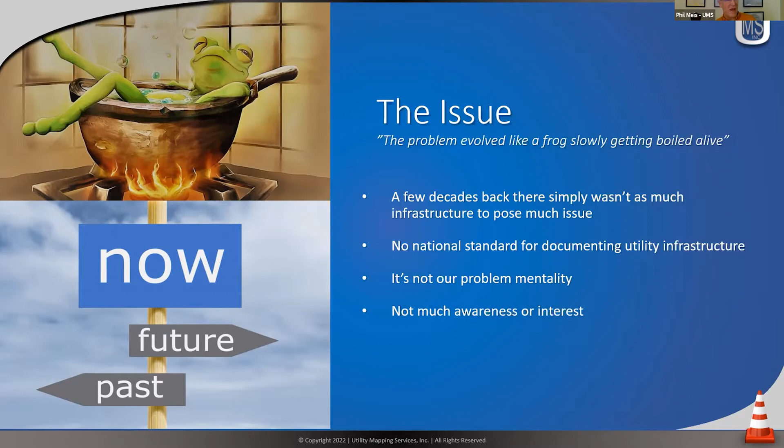And as we all know, we kind of let ourselves sleep at the wheel here. The issue kind of sneaked up on us where we only had one gas company, one Ma Bell, and it wasn't really much of a problem. Now we've got so many things out there. It's really changed to where we have to up our game on how we manage data. And the best time to do that, what I'll talk about with ASCE 75, is documenting them at the time of installation. I mean, that's really kind of a no-brainer.

But so we know utilities are at risk. It's really become a major issue, especially in urban environments. This is actually the same street, and going out after the fact and trying to paint the ground and recreate what's out there is really a horrific operation, and obviously in some cases almost impossible to do. And we're winding up with a lot of issues, paint on the ground, trying to work that into the plans. That's really kind of a primitive way of doing things, but it is a damage prevention process. It's very important, but it's not very conducive for design.

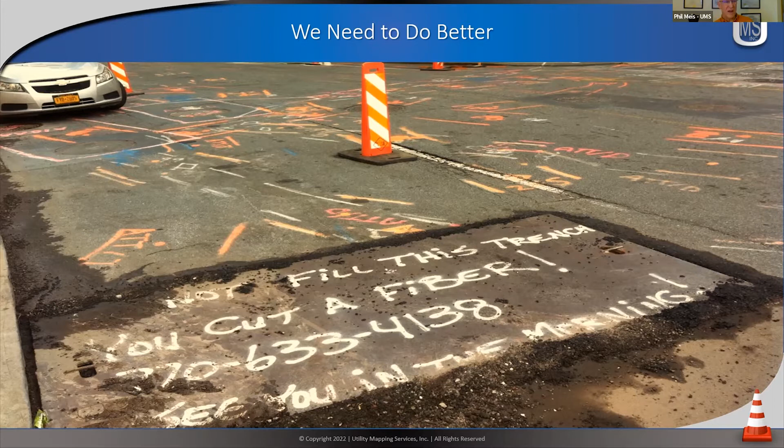And these standards from ASCE have in mind backing it up to when we're in the design stages and trying to get things right so that we can get our designs right to mitigate issues with the existing utilities and try to expedite the construction. We're spending way too much time in the field trying to adjust things, pushing the risk to the contractor. And obviously we know that these are troublesome avenues to take.

So as I think Paige mentioned earlier, the Common Ground Alliance did an investigation. In the last report, 2019, they documented about 500,000 strikes in the U.S. And if you figure that over a 10-hour workday, that's a strike about every minute. I saw earlier that in Ontario, I think, 7 gas lines are getting hit a day.

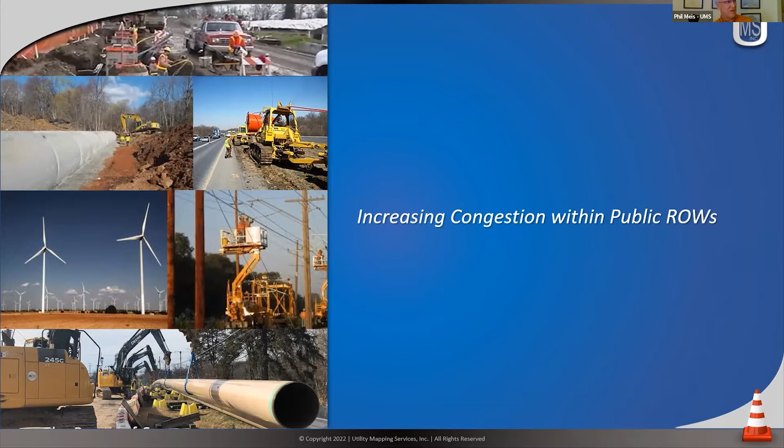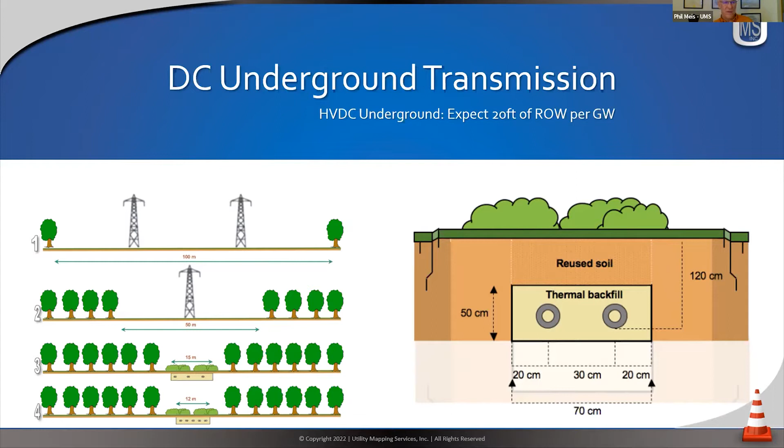Anyway, it's only going to get worse as we open up our right of way for 5G installations to connect up communities and replace old infrastructure. We have population growth, so we have to expand. We have renewable energy sources that we have to collect, and we have charging stations we need to install. So it's really getting exacerbated in the U.S., and I'm sure in Canada. If you're going to be putting in charging stations, you're going to need to install high voltage DC transmission lines, which is one of the things that enables high speed charging, and they require some space. So again, it's just getting worse.

So that's why ASCE stepped in. The American Society of Civil Engineers said, look, what the engineer does and puts out there for construction has a multitude of impacts to the traveling public, the safety, the project schedule, contractor risk, and the ratepayers and the taxpayers all pay for it.

So it really goes back to public welfare, and that's why these standards are engineering standards. What we'd like to do is enter into a world where we can have things well laid out, well understood, in the design stages, and then start applying 3D design technologies, virtual design and construction technologies, and make it so that the construction experience can go as fast as possible with the least amount of risk and issue. And that's going to save everyone money and a lot of headaches.

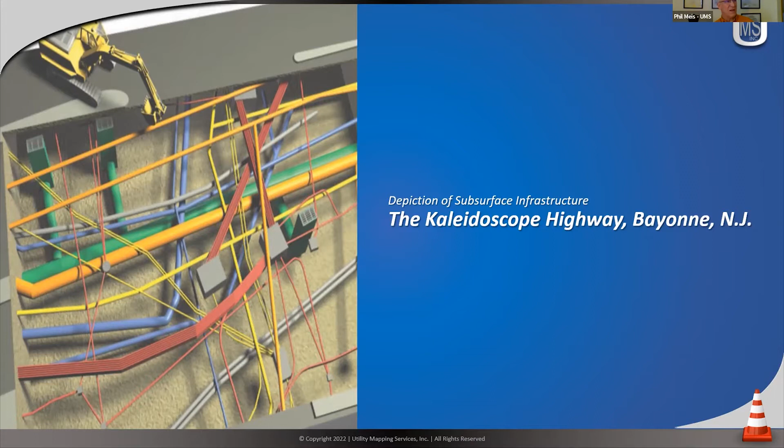And indeed, we have some examples. We can go back. This is 7 years ago now, but this is a project we were involved with, where we were able to collect data in 3D by using some extra methods and technologies, ground penetrating radar and some of the electromagnetic tools. But we didn't have a way to really depict that information. And this was the first use of Bentley's SUDA application, where we were the beta testing team for that application. So we were excited to apply it for an actual project, a gas main installation.

And we mapped all the utilities out in 3D. We designed the gas main in 3D, and the value that came out of that was really surprising. I mean, we kind of suspected that, but by having things where you can view it, the DOT officials that were reviewing the permit application were able to actually see why the gas main wanted to go where it did out in the road, where they wanted an open cut and they wanted a depth variance.

And initially, the DOT, they told us afterwards, they went into the meeting with the mindset, we're not going to let them go under our road. But then after they saw the congestion and why the alignment was selected as it was, it's a high pressure gas main, you need to get that out of harm's way. They actually granted an open cut and a depth variance waiver.

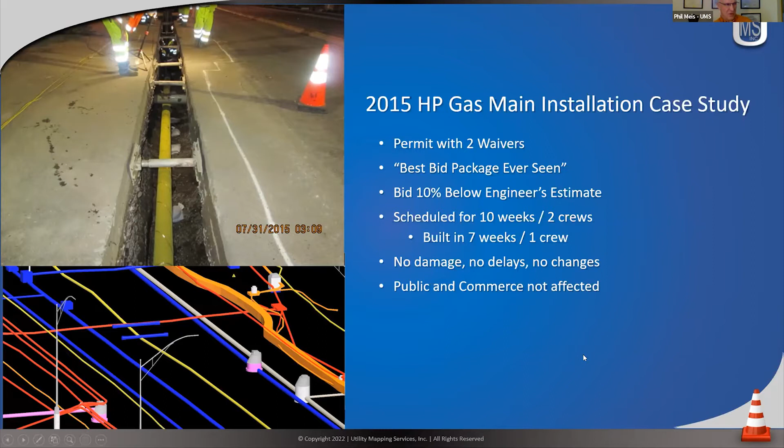Typically, you're doing field fits and you had delays. Public and commerce were not affected. In fact, they had DOT people traveling that road. They didn't even notice the work that was being done. So it was one of the very successful projects. It was built as designed. So that's just a case study, just to show how much value can be reaped by having your data good going into the design and into the construction.

So there's 2 standards, 38 and 75. Both of these standards, by the way, are on parallel tracks. They've both gone through their public comment. They're in at ASCE pubs right now, and I suspect that they will be out for publication, I mean, for consumption, within the next month or 2. If Jim Anspach's on it, he's probably going, it's going to be 2 months. But anyway, it's right there. And I'm going to talk about 38 first, and then I'll talk about 75.

75 is basically a sister standard for 38. And I would suspect at some point in the future, these 2 standards will merge into the same standard. 38 addresses the fact that we didn't keep track of that stuff when it went in the ground, and we're trying to figure it out after the fact. So it basically addresses the symptoms, but it doesn't resolve the problem.

And 75 says, let's track it when it goes in the ground in the first place, or if it's exposed during construction, let's get it right and get this information. And it's not saying what technologies to use. We're just basically saying this is the data you want to collect and manage. And there's another standard I'll mention at the end, OGC, Open Geospatial Consortium, which is a standard for making that data from 75 interoperable, so that you can basically seamlessly transfer it to different softwares and applications.

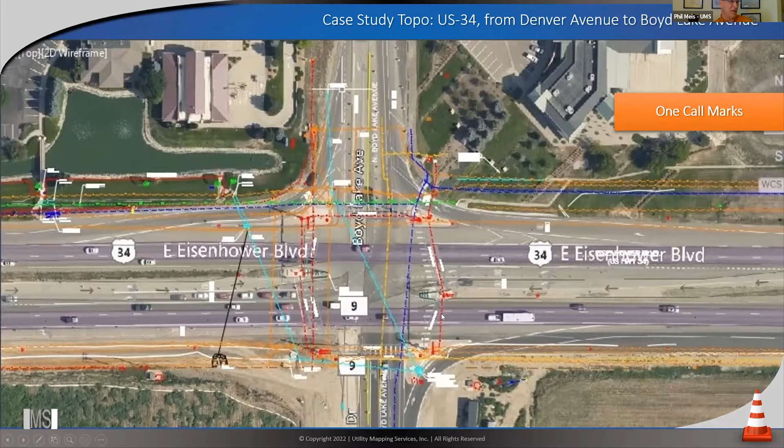And then A would be exposed and discrete. And again, the PE is putting the seal to it, and it elevates it to a professional effort akin to a property boundary survey or a geotechnical investigation. This is an example here, just prior to the Colorado law change, where a project was going to go out to bid. The law changed and we had to go back on this project. You can see the utilities that are depicted, it looks pretty good, but this is based on records and the conventional methods of pulling the information together.

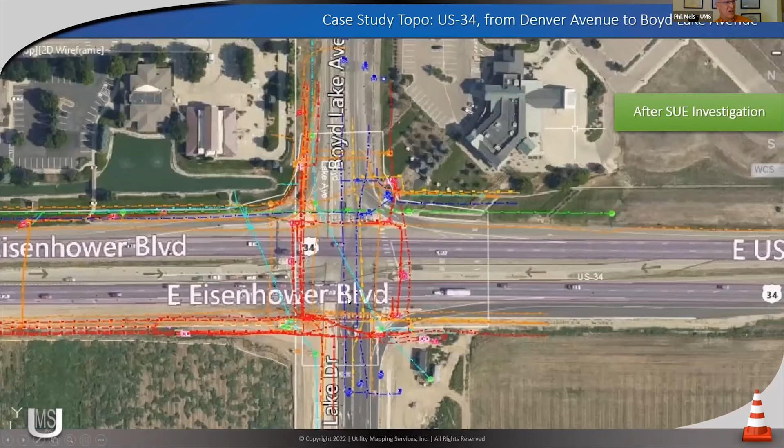This is the same intersection. I'm going to just go back and forth here. This is after a 38 investigation and you can see the density of utilities is increasing, the alignments are changing somewhat dramatically. And these are just some of the things that were identified. There's quite a few things that were wrong. It's been documented as a very good process.

ASCE 38, again, it's a prescriptive and a performance standard. You need to have pre-qualified people to do this work and be able to stand behind it. And the errors and omissions insurance that backs up that company needs to understand what that company is doing and sealing and be able to stand behind it. You need to understand the uncertainty so that the engineer knows where more information is required to complete the designs, so they can modify and adapt designs to avoid conflicts. There's big decisions that are made with this data. You want to make sure that the information is right, and you understand where it's good and where it's not, and have that clearly identified.

For the 38 investigation, you might know on either side of the street very well where that facility is, but where it dived under the street, say they bored it in and they went deeper than the geophysical methods can detect, then you have to fall back to a lower quality level, or maybe use some of these nice new gyroscopic tools, if you had an empty conduit.

We want to accelerate the project delivery process. Again, time is money, and make the public experience less disruptive, less painful. Make sure the project is constructible before the contractor even breaks pavement or breaks ground, and come up with solutions to problems before they happen. It's just a measure twice, cut once mentality here.

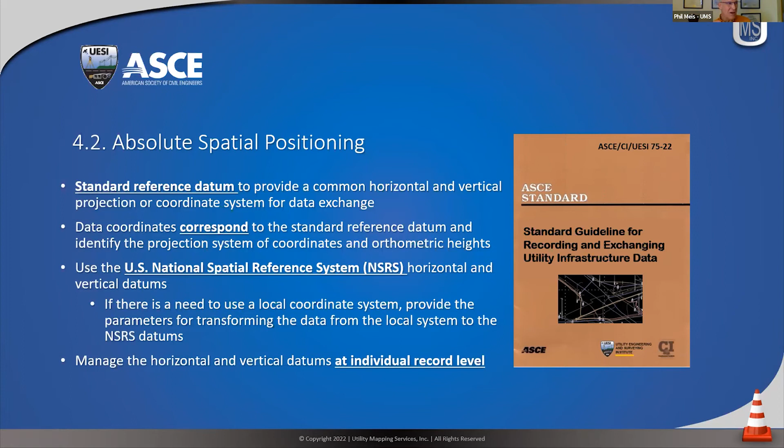Having a standard datum is a big deal. I came from NOAA, the National Oceanic and Atmospheric Administration. This is the same thing we do for nautical charts, hazards to navigation. We're just applying it to hazards to excavation. Everything is referenced to the National Spatial Reference System. Why do you do that?

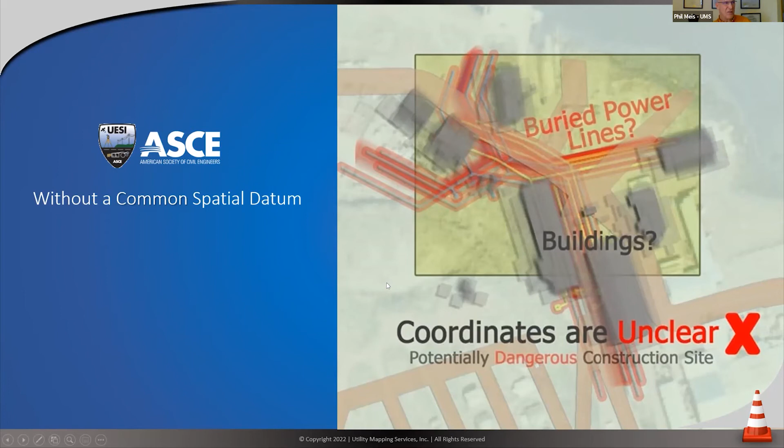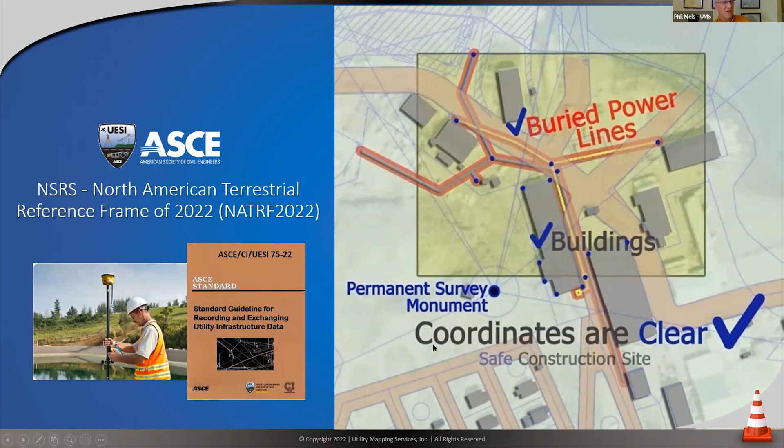Well, that gets rid of all the distortion that happens when you're trying to take something on a sphere and flatten it onto a flat plane. There's different projections, state plane, county coordinates, UTM, and they all distort the image. By having everything referenced to the National Spatial Reference System, when you bring it together, it's going to go in the same spot every time. And it accounts even for plate tectonics and crustal drift, and in places like California, that's a big deal over 20 years. And that's easy to do.

Whenever you turn on your GNSS system, you're tied into your National Spatial Reference System. Canada has a very similar one; in fact, I think they're using the same one for North America. The National Spatial Reference System is being upgraded, and it should come out, I think, in another year.

The other thing is observations. If you're using that LiDAR system we saw earlier, you can just pull data at this frequency or tighter. The idea is to get enough observations to achieve the accuracy that's required. There's an accuracy table that goes with the standard, which we basically piggybacked off of CSA 250, the Canadian standard. And we have CSA 250 people on our standard committee, by the way, very helpful.

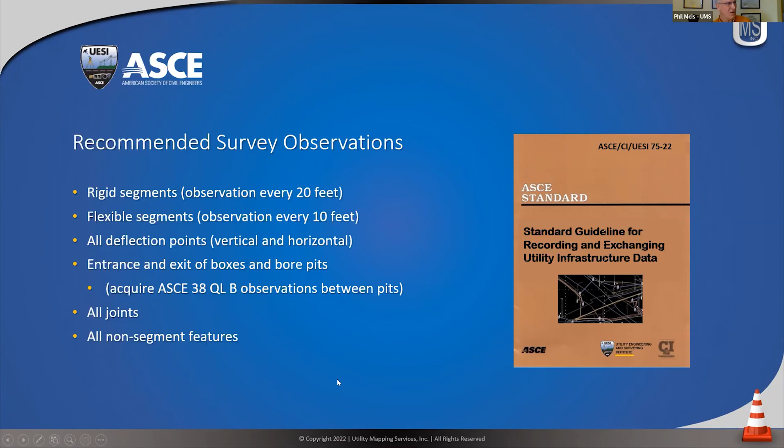They told us we want to see this succeed, and there are three things we wish we would have done with CSA 250. One was make it digital, two was make it 3D, and three was to also include above ground infrastructure with the standard. So we made sure we brought that into 75, and going forward we're sharing our information back and forth, and you'll see that the standards are probably going to merge together and be very similar in nature.

Another thing was the observations. If you're getting the top center of the pipe, you record that, but what's exchanged will be the reduction, so it'll be the center of that infrastructure, typically the center of the pipe.

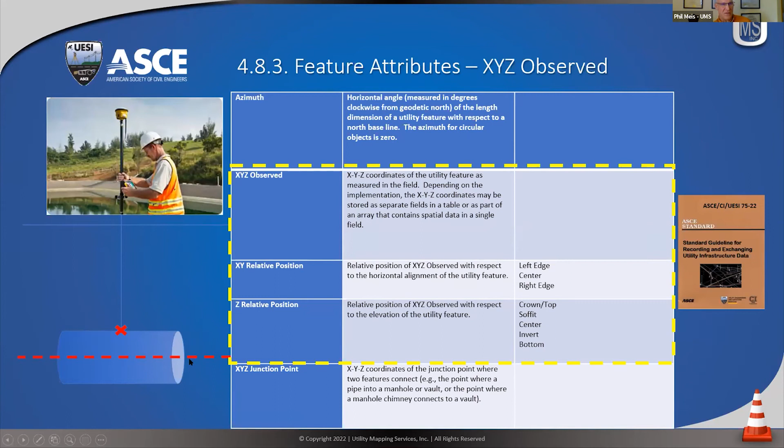There's data stewardship. We addressed what to do if it's sensitive and secure information. There are standards we are referencing here in the US; we're using 49 CFR 1520, which talks about how to manage sensitive and secure information. That's a big issue with a lot of utility owners. They don't want that information available to everyone. That guidance is provided in the standard to make sure that information is kept secure.

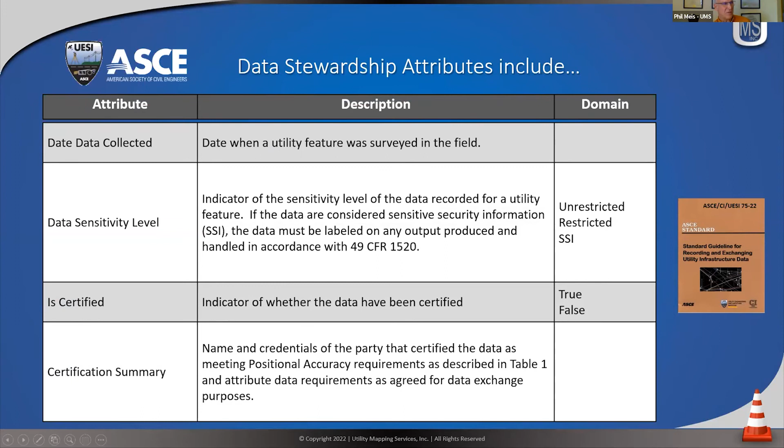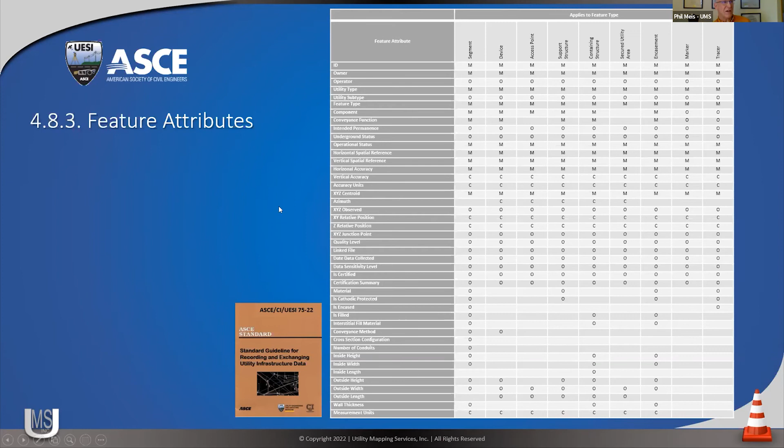That alleviates their concerns. Don't expect to read this, but you have minimum, optional and conditional attributes. We have one table for documenting infrastructure, and these are the minimum requirements, the M's. Basically we want enough information that we can create a digital twin or a very useful 3D model of that infrastructure in a standardized manner.

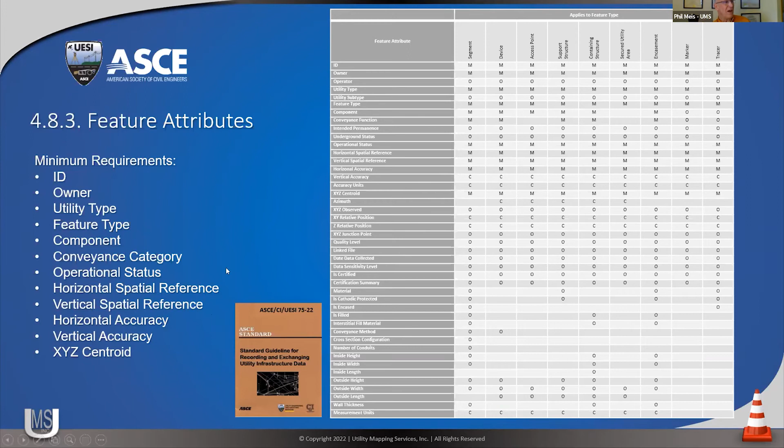We'll have to have, maybe at the next conference, a workshop and actually go through this. But this is just showing how it's applied in the field. If, say, you're putting in the sanitary sewer force main, you would take observations at a frequency necessary to achieve the accuracy standard.

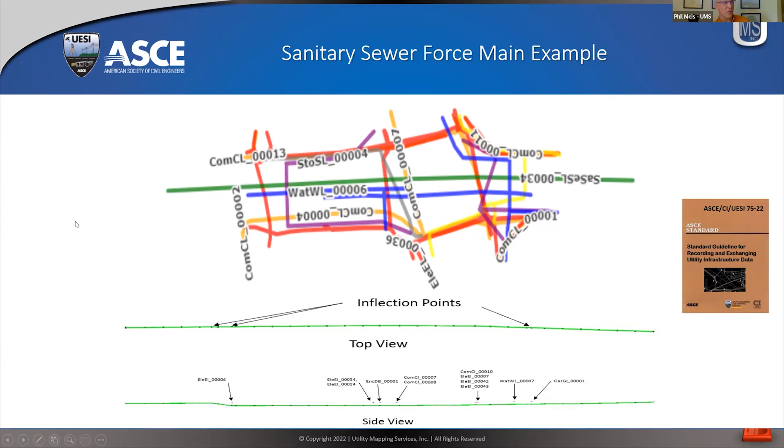There's an accuracy table that goes with this standard, and then you're also going to take observations of anything exposed that you might encounter along the way, and document that as well. That's free data, so not only document what you're putting in, but anything you expose along the way. So this standard can be applied for contractors for utilities when they permit to go on the right of way. It's a fairly easy to implement standard.

Directional drilling, you'd have observations at the bore pits, and if you had a test pit where you had to bore through it, you could get accuracy levels to the accuracy that's required. And then in between, we also lean on ASCE 38, so you'd have ASCE 38 quality level B data where you would use gyro or other geophysical electromagnetic tools to get depth information, and that's all included. So every observation records where that data came from, if it was a direct observation or if it's quality level, and you have horizontal and vertical accuracies that go with that.

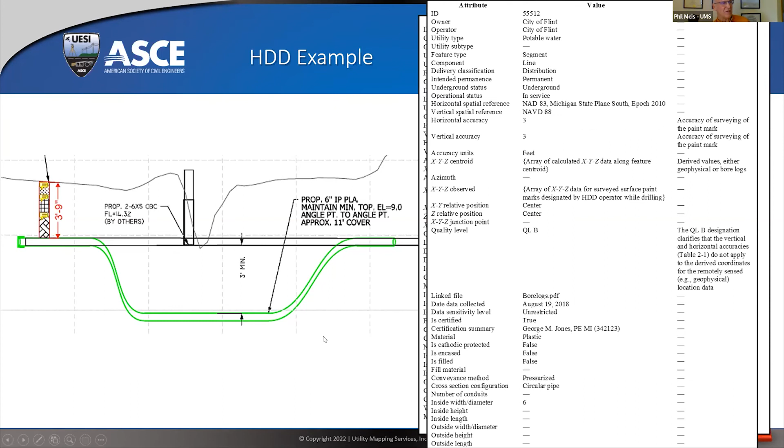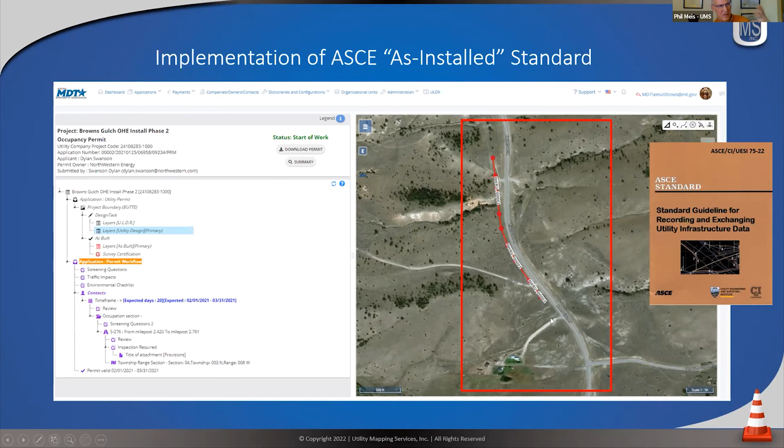We implemented the standard in the US in Montana under an MOU while it was still under draft, and it's been used for several years now in Montana with new installations at the time of permit. And we can collect all the attributes in an approximate alignment at the time of permit. Very easy to do. The person filling out the permit understands all those attributes and can plug them right in. And then when the actual work happens, basically the approximate alignment's upgraded to the actual observation, the survey data. This has actually received a national award as well as in Montana. So again, these tools can come into play now.

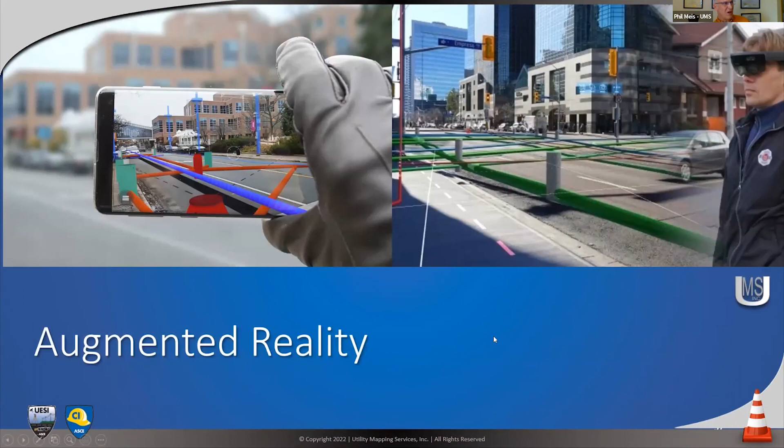The last comment I want to make is Open Geospatial Consortium has adopted both ASCE 38 and 75 as important input to their Model for Underground Data Definition and Integration. And that MUDDI model basically is your interoperability. If you bring the data forward, you can view it in Bentley, and then you want to transfer it over to Esri or have it live referenced in. This is the standard that does that.

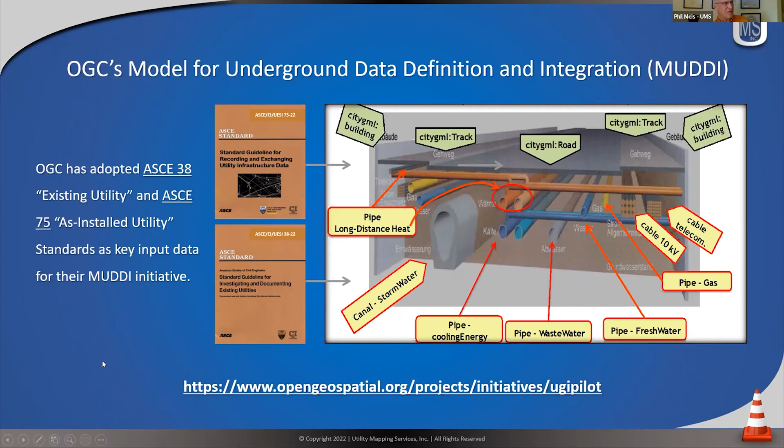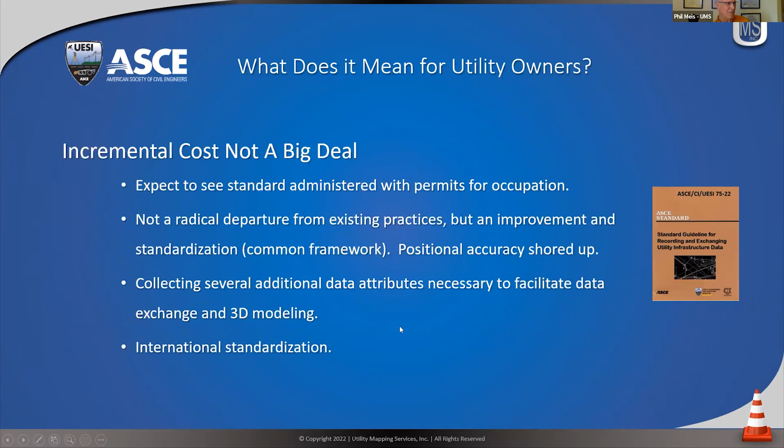Anyway, this is being developed right now, and it's in draft format, but all your major application developers comply with OGC. When you collect the data in accordance to ASCE 38 and ASCE 75, you're set for going forward. And again, we want to enable all these great technologies that are out there and really enhance the damage prevention and use augmented reality. And the incremental cost is not a big deal. We've already shown that, especially with the technologies out there today, the achieved benefits really dwarf the costs.

There was a study done. We know that subsurface utility engineering brings value to projects, and there's all kinds of studies that demonstrate that. This NCHRP paper that was done just 2 years ago, we basically were able to lean on the value from SUE and project that there's going to be tremendous value from just documenting it when it goes in the ground in the first place.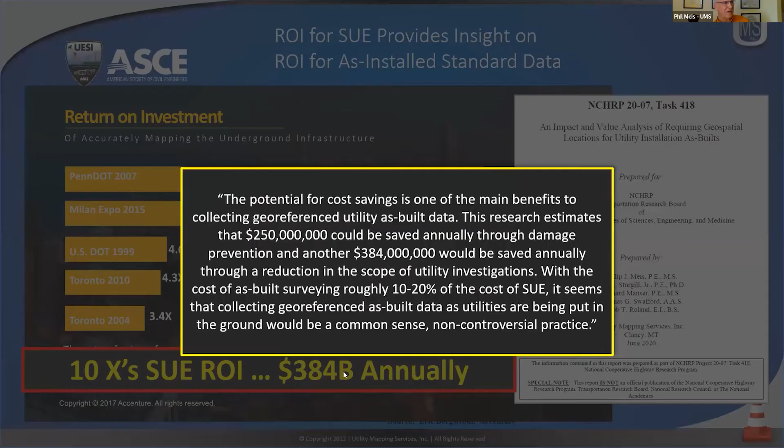And thank you very much. Thank you so much, Phil. That was great. Very, very detailed. That's certainly the most I've ever learned about that standard. That's drinking from a fire hydrant. But sorry. Oh, that's what we're here for, though. This is what this event's all about. So thanks for presenting that. It was very important. My pleasure.

So we've got a question in from the audience. Are the ASCE 38 and 75 new standards going to be released soon? Yes, they should be. I would expect they're in the pubs right now. If Jim Anspach was on here, he could probably tell you more accurately, but my understanding is we're looking at about 6 to 8 weeks.

Is there anything you wanted to leave the conference with? No, I think this is a tremendous conference, and I'm really excited. This is exactly why we wanted to develop these standards, and we started out 9 years ago. We knew these technologies were coming out for both collecting the data and then leveraging the information. So I hope to be able to participate in your upcoming conferences and help share these standards and make sure they're adopted going forward. Thank you so much. Yeah, these standards are so important. They allow us all to work together.